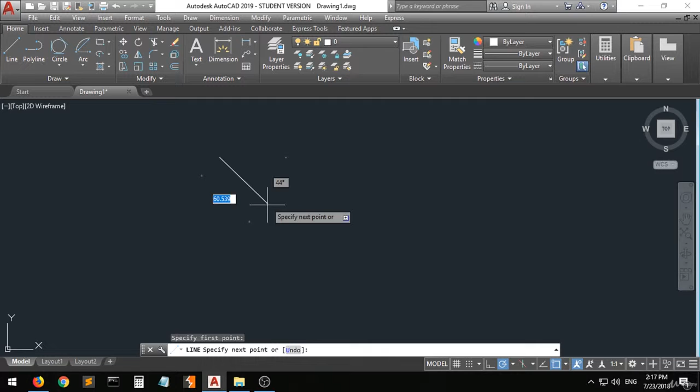First of all, I'm going to explain the move thing. So let's assume we have this shape over here, and you want to move this whole shape from a point to another. Let's assume we have this line, and you want to move this shape from here to another point, or to the end point.

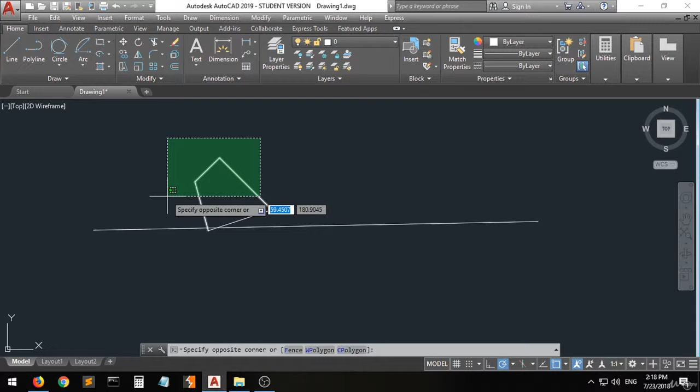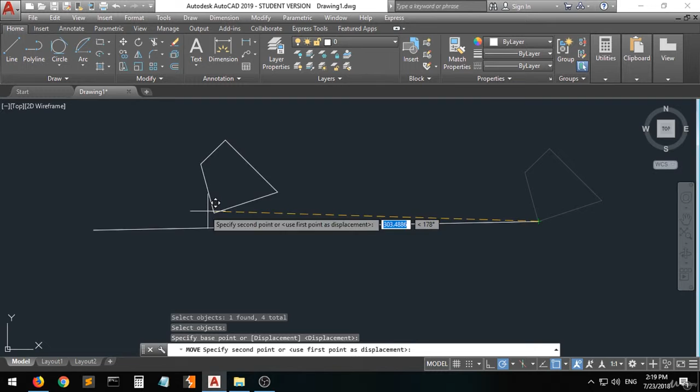If you want to move, you have two ways of doing this. You can do the selection first, select all the shapes, click on the moving command, specify the point you want to move it to, and as you can see, you can move it from anywhere. The other way is you can press on the move command, do the selection, then press enter, and specify the point you want to move from here to here. As you can see, it is all the same.

But what if you want to move just this one? You have to activate it or select it, press the move button, specify the point you want to move it, and then move it to here. See, very easy. Not only lines can you move, you can also move the circle.

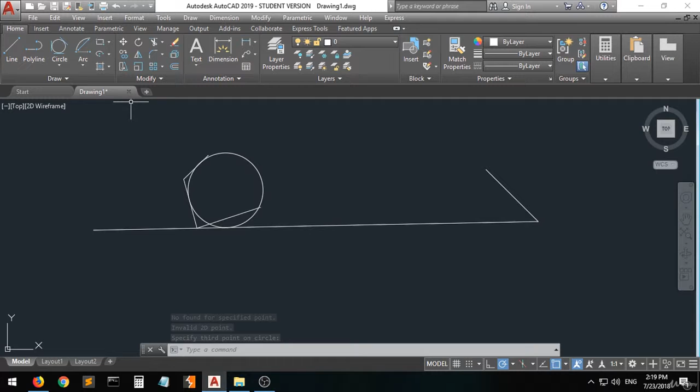So you can see there is this circle, and you can move it by activating it, moving it. You can move it whether from the center, the tangent, or this intersection. I prefer to move it from this intersection. I'm going to zoom out using the mouse wheel. You can see that the circle has been moved to this place. So it is very easy for the move command.

Let's go to the rotate command. What if you want to rotate this shape 90 degrees, or flip it? You have two ways, as we said: whether you do the selection then click on the command, or you click on the command and then do the selection, then enter. Okay, we did the selection first. We're going to use the rotate.

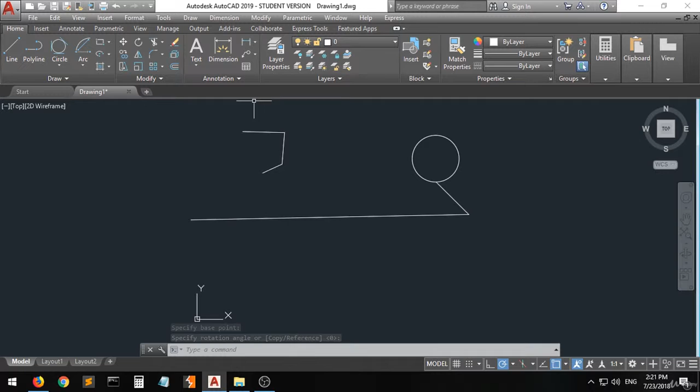You have to specify, as you can see down here in the command, rotate, specify the base point. This is the base point. As you can see, I can rotate it whether in this side, this side, or this side. You can rotate it in the direction you want. I want to rotate it here. See, it is rotated around the point you have selected.

There are some other options for rotating, like this. Then press enter as we told you. Specify the base point as they're telling you, for example this point. See, we are moving the shape around the point we have selected. For example, like this. It is very easy, very simple.

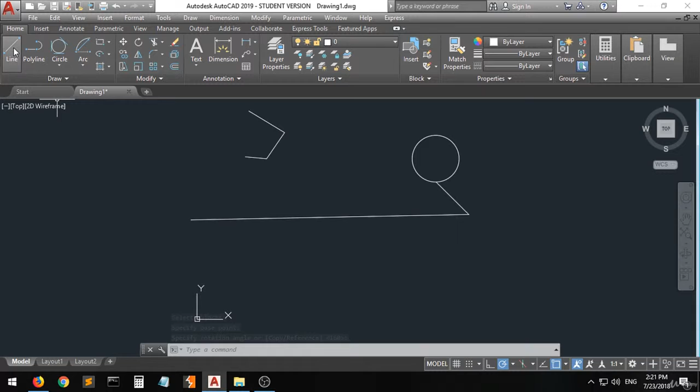Now we have some other commands that I'm going to show you. First of all, let's draw a line like this, press enter, and zoom in to this. As you can see, there are some extra lines going out of the shape that we want. I want only this shape, this, and this - I don't want the extra line here, here, or here. So if you select it and press delete, you can see that the whole line has been deleted.

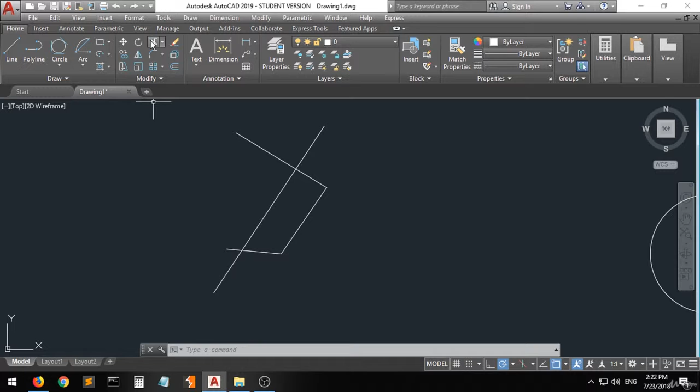Press Ctrl Z for undo - I just wanted the extra line here to be deleted. So what we are going to do is use the trim command. Click the trim command, select all the area or lines related with this line, select this area, then right click. Now, where is the line you want to delete? This line - as you can see, the line you want to delete has been a little bit hidden. Click on it, and as you can see, it has been trimmed. Now press enter.

Now we want to trim this line. Again, go to the trim, select this thing, then right click. I want to delete this line. See, click on it and it has been trimmed. Very easy.

Now again, do this with me. For this line, we have to choose the trim command, select all the intersection area, right click, and then click on this to trim. You don't have to press enter now - if you want to trim this thing, you can do it right away. As you can see, you can trim two lines at the same time. You don't have to redo it again. Enter.

Let me show you again and do it together. For example, if we have this line, then this line, then this line, and then we have this line, okay, we want to trim all these extra lines. I want to only have this four-sided shape.

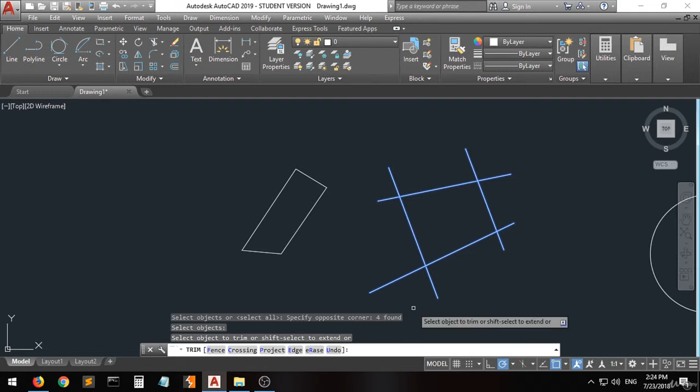Go to trim, select the whole shape, and right click. Now you can trim all those shapes at the same time, but you have to select all the lines related with the extra lines. You can also use the selection or box selection to do this. See, very easy.

You can click the right mouse button. Once the selection box has appeared, choose the things that you want, and then they've been deleted. Again, you can click one by one, or right click, let the selection box appear, select what you want, and choose them. Once you've trimmed everything, just press enter. Now we have this shape without any extra lines.

And that's the trim option. We have some other options here, including the copy command.

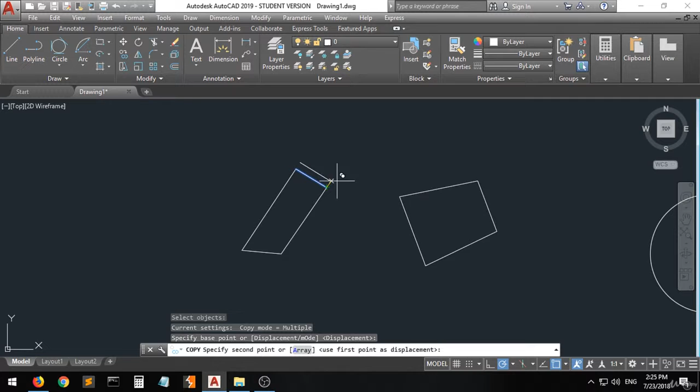Click on copy, select the shape - they tell you to select objects. Let's select this line, this line, this line - I want to select this line. Then right click. Where is the base point you want to move it from? See, now it has been copied.

You can do a lot of copies with one move - copy, copy, copy, copy. See? Very easy. Once you're done, press enter.

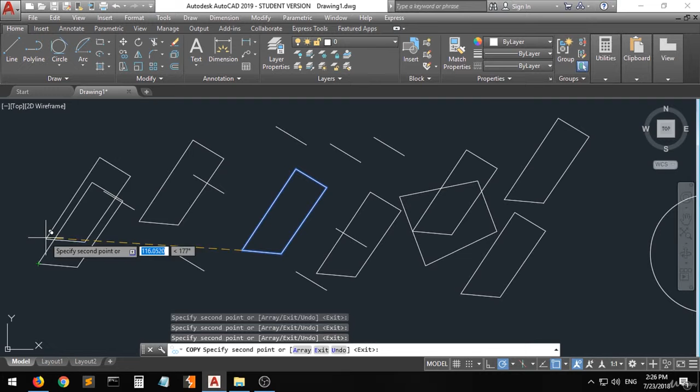If you want to copy a line, you can do it, and if you want to copy the whole shape, you can do that too. Click copy, select the whole thing, right click, and specify the base point you want to move from. As you can see, you can copy the whole shape. Once you're done, press enter, and all the copies have been created.

We have some other options. I guess it's a little messy in the drawing space now, so let's delete the whole thing here, zoom out, and delete. Let's just draw a circle using center and radius.

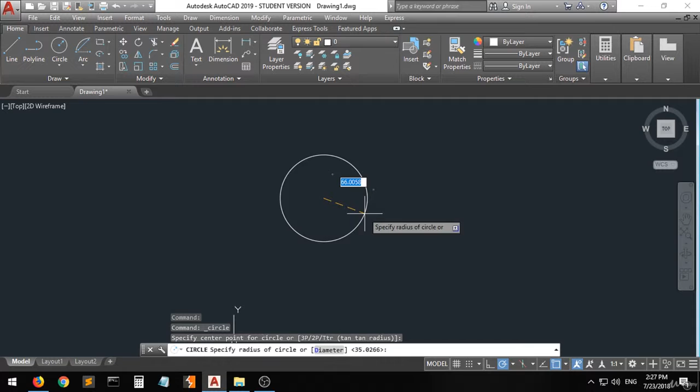What if I want to copy this circle? Or sorry, what if I want to do a mirror for this circle? Let's draw, for example, a triangle, and let's delete this.

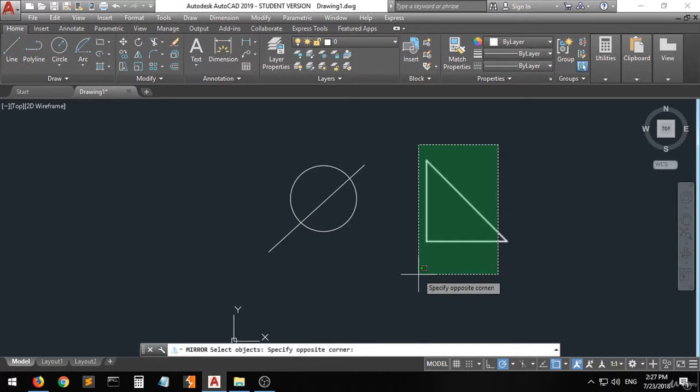Now let's choose the mirror command. Where is the object? Select the objects you want to mirror. You can do it for just one line, or select the whole shape - I want to mirror the whole shape. Enter. Selected. Now do enter or right click.

Then it tells you to specify the first point of the mirror - by this they mean the line you want to mirror around. I'm going to choose this and this line. You can do it along this line, around this line, around this line, but I'm going to choose from here to here.

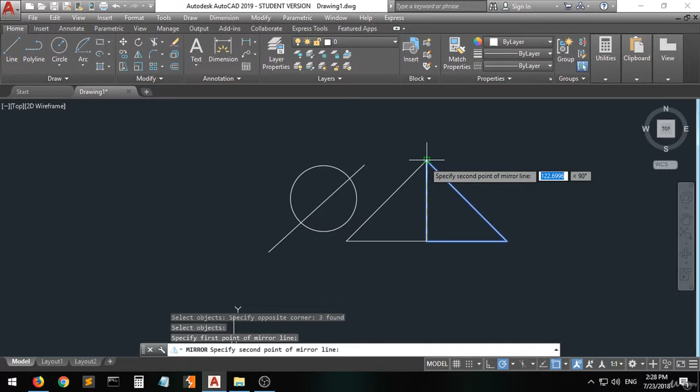Select this point. Then it asks: erase the source object? If you want to choose yes, yes; if you want no, no. I don't want to erase the original shape, so no. Now, as you can see, we have this mirrored triangle.

Let's do it again with the circle. Choose mirror, select the whole shape you want to mirror, right click, then specify the first point you want to rotate around - you don't have to choose anything specific on the drawing, just any line from here to here. Now, erase source object? No. As you can see, the circle with the line has been mirrored around the line in between. Very easy.

And that's the mirror command. Now let's move on to the fillet. The fillet is related to making hard or pointed angles more round, or wavy or curvy, creating curves from that angle. So let's click on it.

Activate the command - you have to select the line related to the angle. I want to select this and this. I'm sorry, I guess it has been disabled. Select these two points, select the fillet thing - this one and this one. I guess there's something wrong. Now select second object or select the radius.

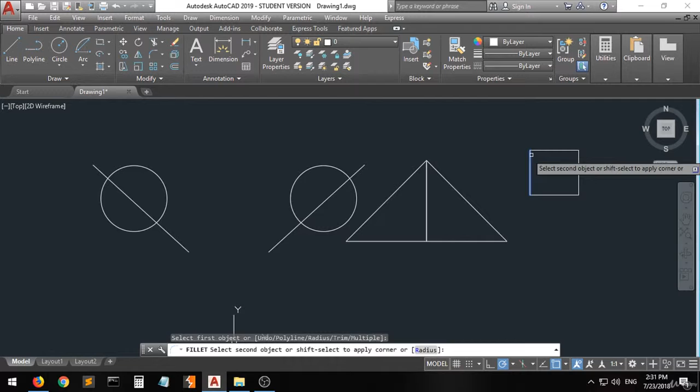Let's do a rectangle and go for the fillet. I'm sorry, I guess there's something wrong with the program, so I'm going to explain the fillet again. I guess there's something wrong with the software right now, but that's it for all the modifying commands.